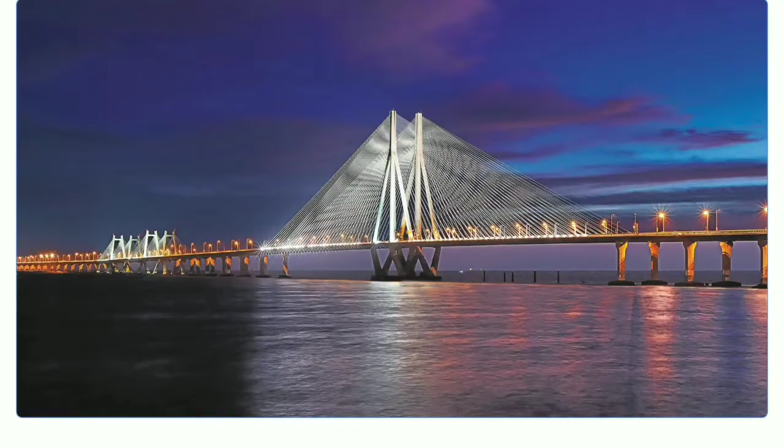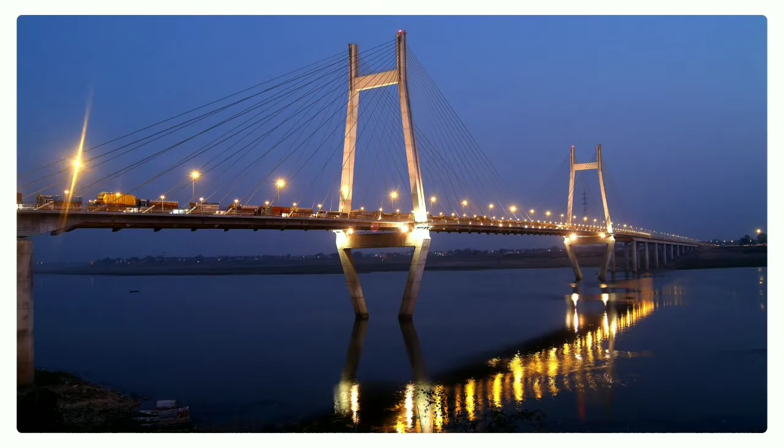I'm Sachidananda Joshi, and my topic for the day is enhancement of Indian bridge management system using analytics within BIM data model. Bridges connect two communities. They connect residential and industrial areas. They enhance the landscape of the city. BMS the world over was initiated due to the collapse of Silver Bridge in USA.

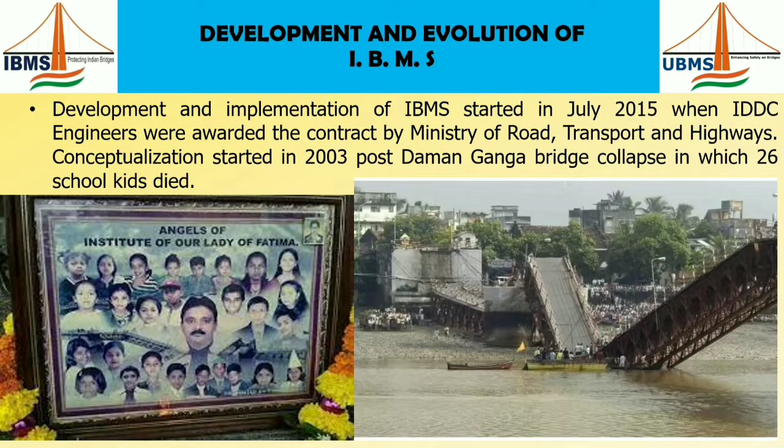Indian Bridge Management System, or in short IBMS, owes its initial conceptualization also to the tragic loss of 26 young kids. Conceptualization started in 2003 post Daman Ganga Bridge collapse, in which these 26 school children died. It was a tragic incident. We started the conceptualization and we conceptualized IBMS as a linear path protocol.

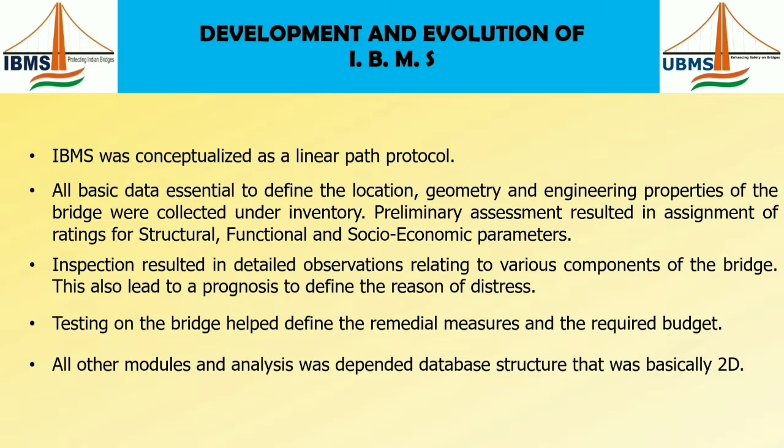All basic data were collected under inventory. The inspection resulted in detailed observation. Testing on the bridge helped us to define the remedial measure and the required budget. All other modules and analytics analysis was dependent on the database structure that was basically two-dimensional.

Preliminary assessment resulted in assignment of ratings for structural, functional, and socio-economic parameters. Ratings were assigned based on visual observations only. The rating system that we adopted was from 0 to 9. 0 indicated critical state and 9 indicated excellent state. These were used in progressive decision making process, so consistency and correctness during assignment was critical.

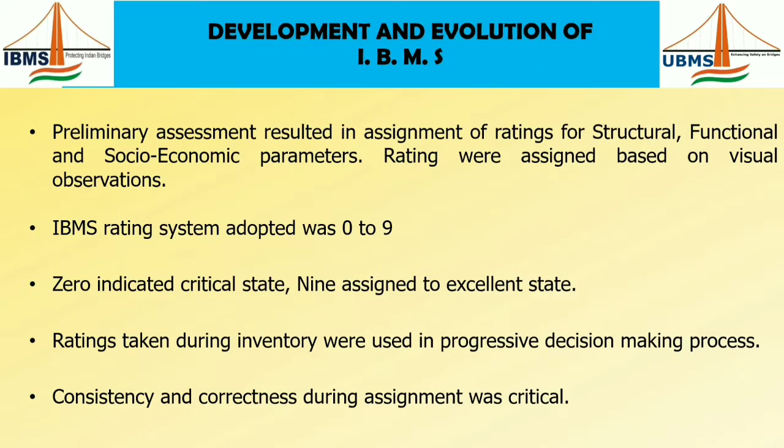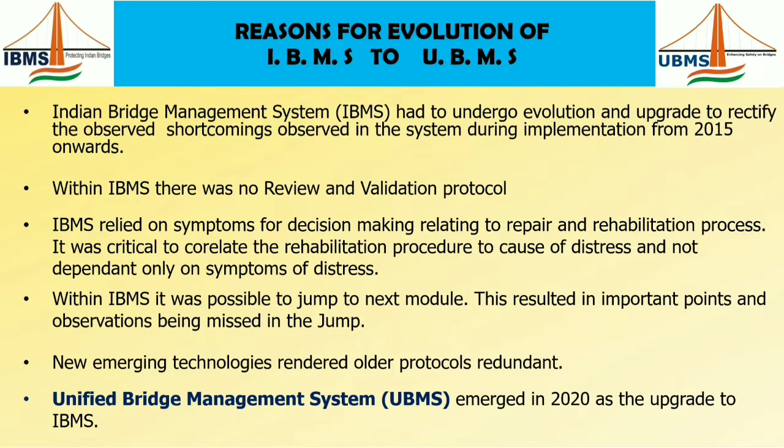What were the shortcomings that we identified during implementation? We realized that within the IBMS linear protocol, there was no review and validation protocol. IBMS was dependent on symptoms for decision making. Within IBMS, it was possible to jump to the next module. This resulted in missing important information, and the emerging technologies rendered our protocol redundant. What emerged out of the upgrade was called a unified bridge management system, UBMS.

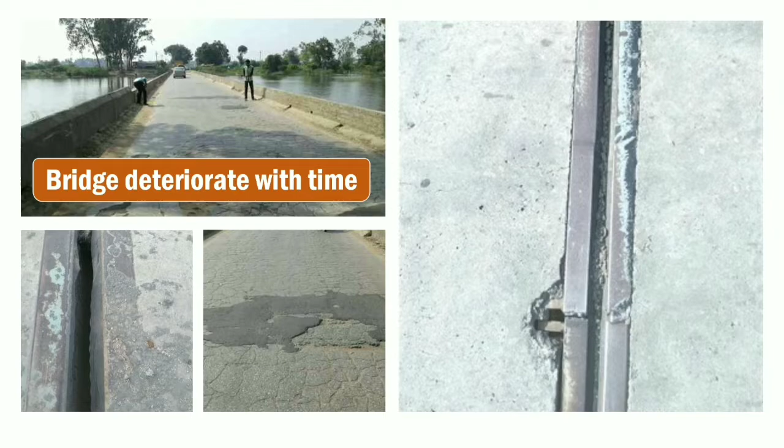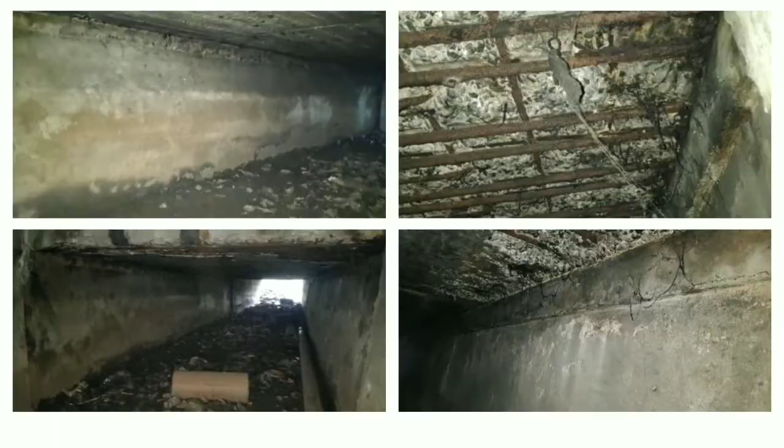One must realize that bridges, like all structures, deteriorate with time. Our system needs to mature with ongoing research and focus on the final aim to prevent such loss of people that occurs due to collapse. UBMS is an intermediate step in this ongoing research.

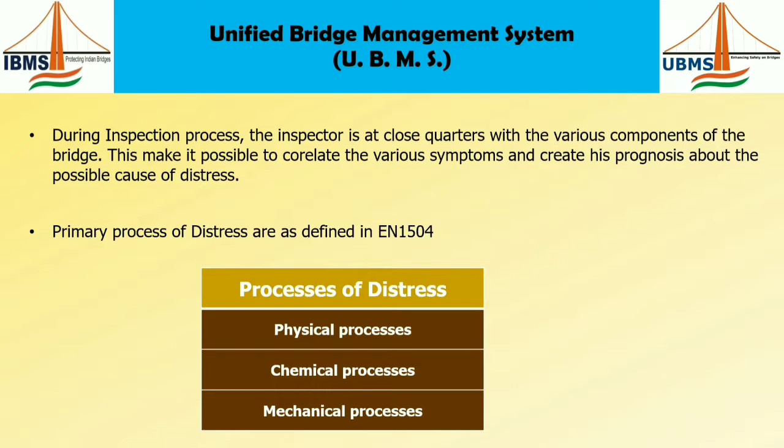So what is UBMS? In the inspection process, the inspector is at close quarters with various components, making it possible to correlate various symptoms and create his prognosis about the possible cause of distress. This is similar to when you go to a doctor: the family doctor makes his prognosis and then sends you one step forward. EN 1504 published in Europe defined three processes of distress: physical processes, chemical processes, and mechanical processes.

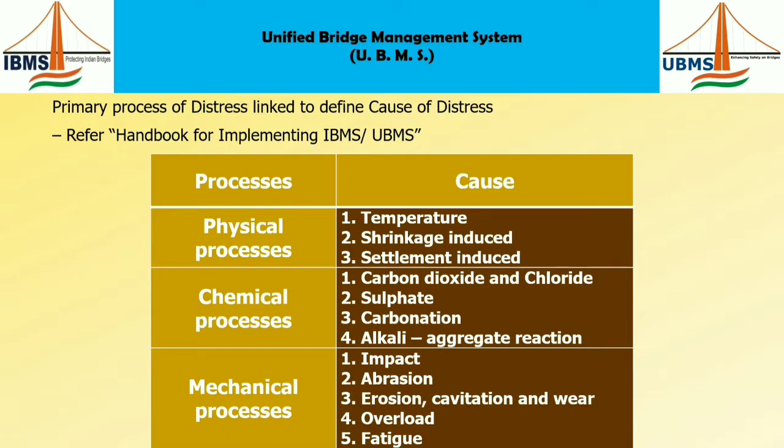Further, in our handbook for implementing IBMS/UBMS, we defined 12 causes as sub-processes or class causes within the physical, chemical, and mechanical processes. Based on the prognosis of deterioration, the inspector assigns a rating from 0 to 9 for various sub-processes, which results in a matrix called the cause matrix.

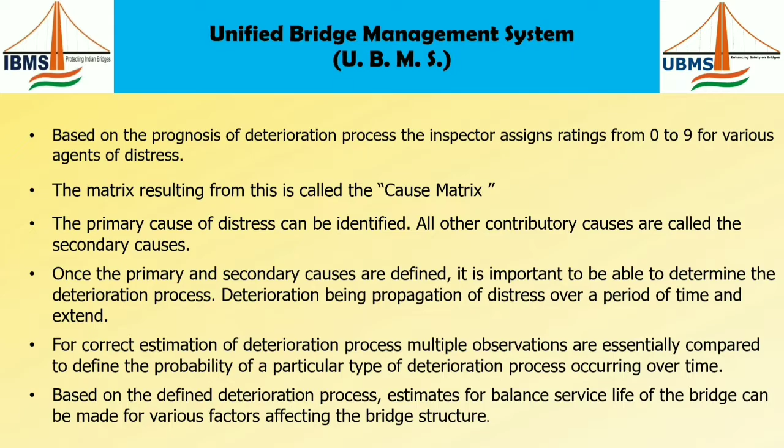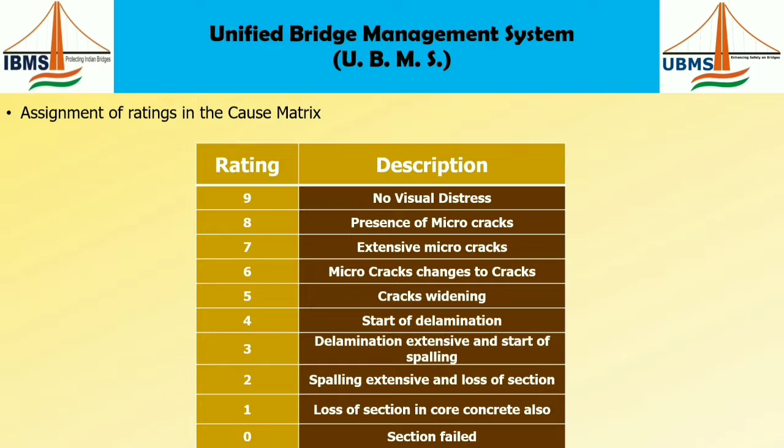Once the primary and secondary causes are defined, we need to determine the deterioration process. For correct estimation of the deterioration process, multiple observations are compared to define the probability of a particular type of deterioration process occurring over a period of time. This leads to estimation of balance service life of the bridge, which can be made for various factors affecting the bridge structure. Evaluation of balance service life estimates the risk involved.

Structural behavior is based on location of the loading and the reaction of this loading to various other factors, with the discontinuity in the section subjected to loading. Location of such discontinuity also affects the response of the section. One has to realize that the behavior of the structure is dependent on the geometry and various other conditions, including the geometrical location of the discontinuity.

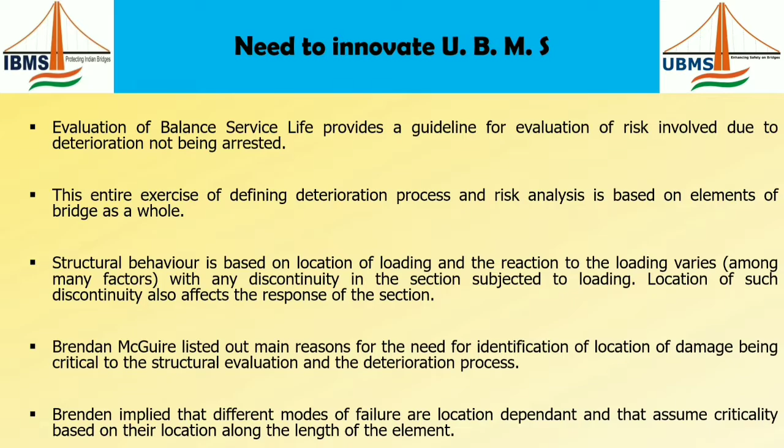Location of the damage is critical to structural evaluation and determination of the deterioration process. Modes of failure are also location dependent. It could also affect the load capacity evaluation of the member along the length of the element. None of the existing bridge management systems, including UBMS, is able to provide accurate digitized data relating to the location of the damage or distress.

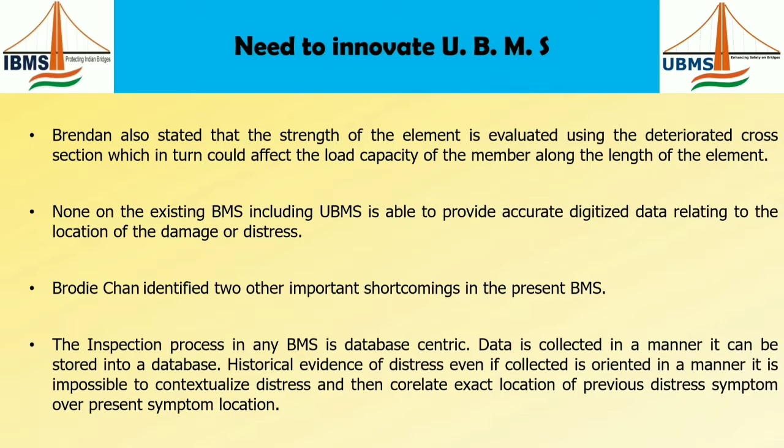They have sufficient data regarding the cause of the distress and other related factors to enable deterioration modeling to be done. But the critical aspect of the location of the damage or distress is a gray area. Research is ongoing. It is impossible to correlate exact location of previous distress symptoms with present symptom location because the data is based on a database. This hampers the correct evaluation of the deterioration model.

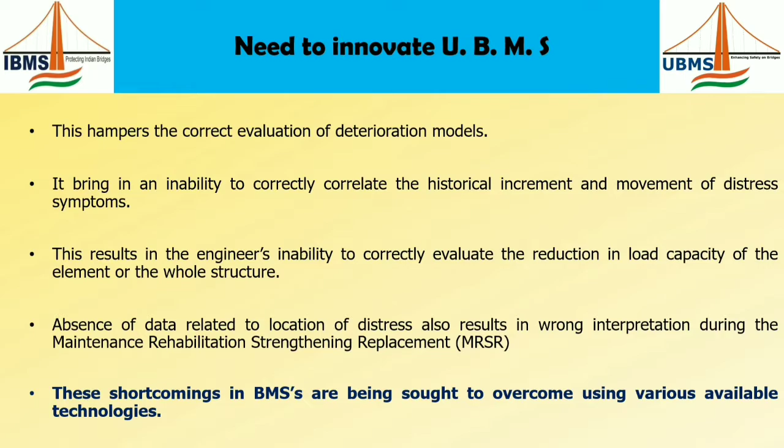This results in the engineer's inability to correctly evaluate the reduction in load capacity, and these shortcomings of bridge management are being sought to be overcome using various presently available technologies and ongoing research. So, what are the new technologies that have emerged? Advent of unmanned aerial vehicles or UAV changes the way inspection can be done.

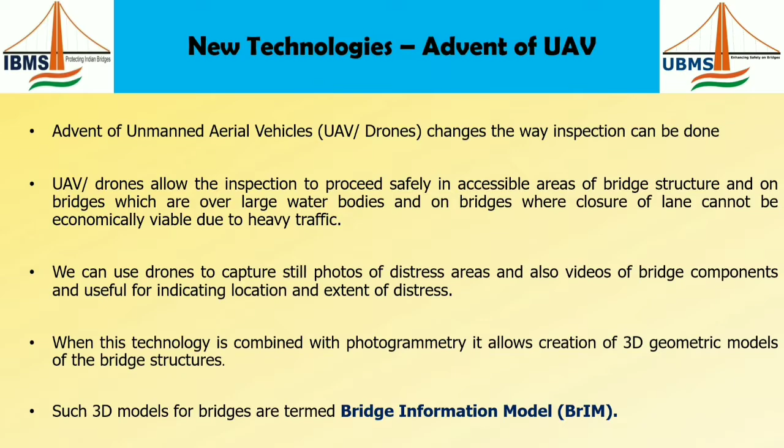We can use drones to capture still photographs or videos of bridge components, which are useful in indicating the location and extent of distress. We can prepare 3D models based on such videographs and photographs, and these models are termed bridge information models. Comparison of year-on-year photographs and video can indicate the progression of distress.

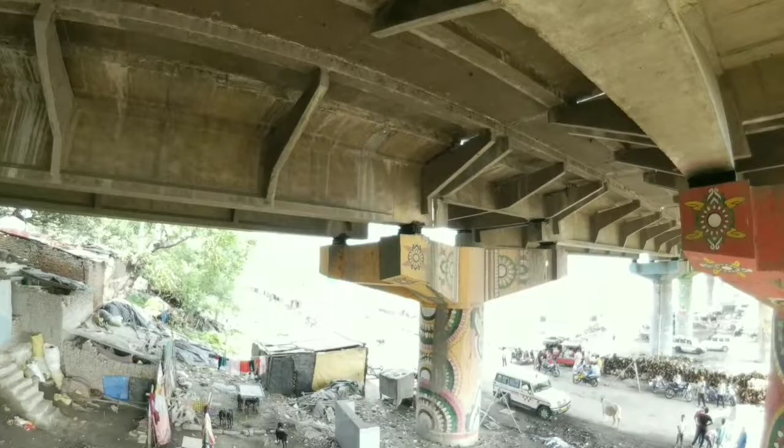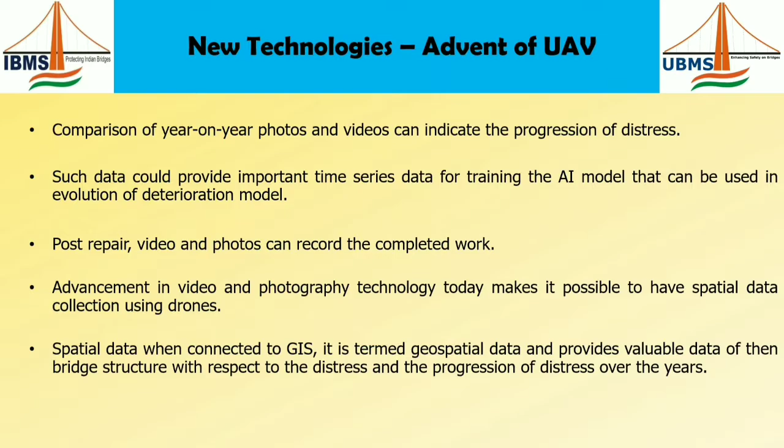Such data could provide important time series data for training artificial intelligence and machine learning that can be used for the evolution of a realistic deterioration model. Spatial data, when connected with GIS, can be valuable data for the bridge structure for determining the distress and the progression of distress over the years.

How can we correlate this? Photogrammetry is the next tool for 3D modeling. Photogrammetry can make 2D or 3D models and take measurements using photographs and video files. This technology, in conjunction with the drone-captured data, helps in the creation of a geospatial 3D geometrical model.

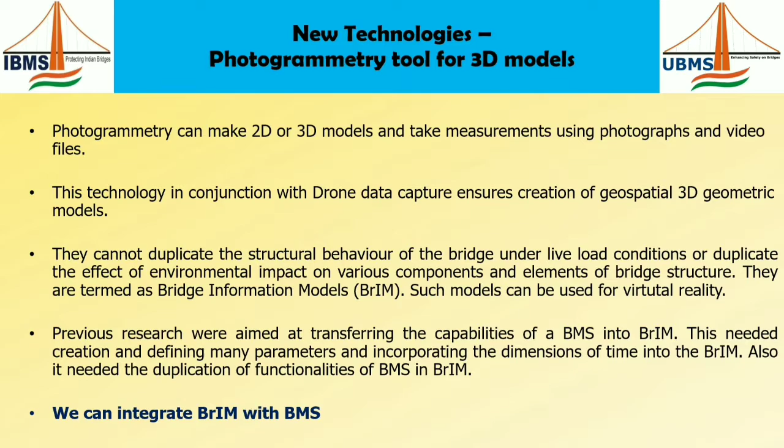All these models are purely geometrical models. We can integrate this with the bridge management system. So this brings us to an important question: why is the bridge information model required, and is it the final destination, or is it sufficient? UBMS is a cause-based bridge management system, and it relies on symptoms resulting from 11 deterioration processes.

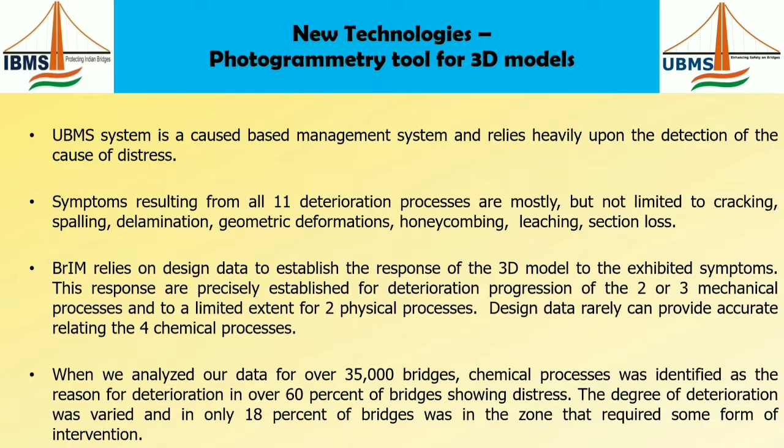When we analyzed our data for over 35,000 bridges, chemical processes were identified as the main reason for deterioration in over 60% of the bridges showing distress in India. Within UBMS, the digitized data collected for distress location is purely descriptive. We would still need to be able to correlate this data with the image library.

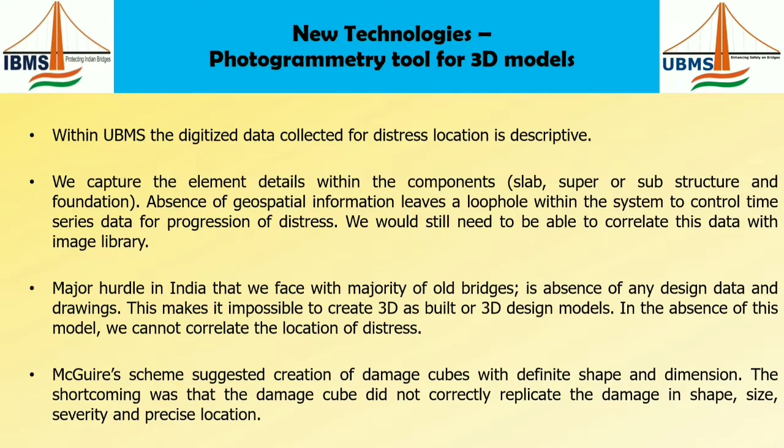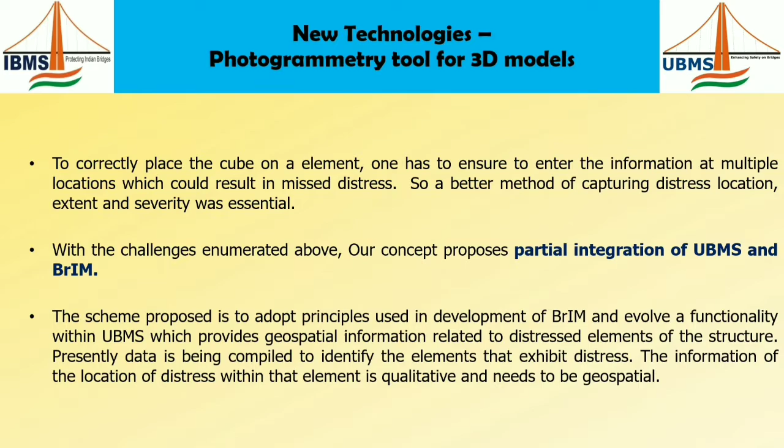No design details are available, and that is a major hurdle in India. In the absence of this, the model that we prepare can only be a geometrical model and cannot be a performance model or a digital model. With the challenges enumerated above, our concept proposes partial integration of UBMS with the bridge information model. The scheme proposed is to adopt principles used in the development of BRIM and evolve functionalities within UBMS to make it more workable. So, what is partial integration and how is it achieved?

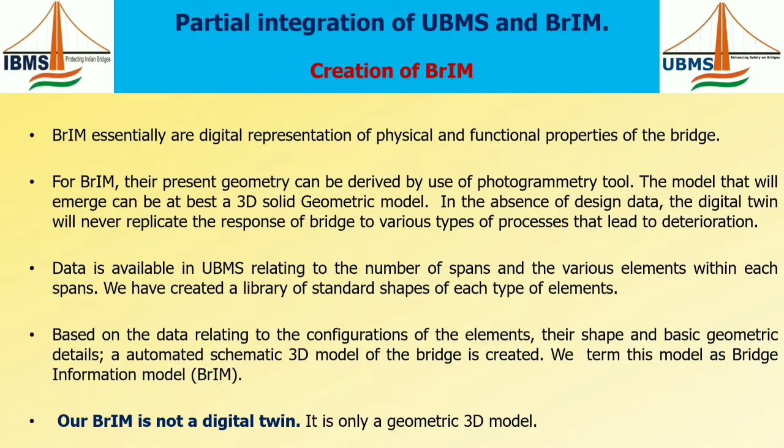The first point is creation of the bridge information model. Data is available in UBMS relating to the number of spans and the geometry within these spans. Based on the data relating to the configuration of the elements, we can create a schematic 3D model of the bridge. This is a geometrical model and it is not a digital twin. Various photographs of the bridge are then attached to the bridge information model.

For elements which show distress, continuous photos with overlap are used to create a 3D model only for that distressed element. This 3D model is created based on drone-captured videos or photographs. This model is for one distressed element, with details of the location of distress in the element. Since it relates to the location of distress in the element, we have termed it the LODE 3D model. Creation of such a LODE 3D model using real-time photographs ensures that the correct and precise location of the distress is captured.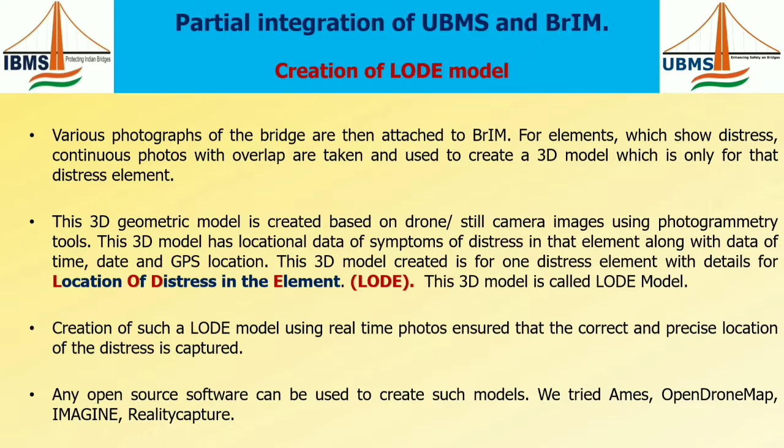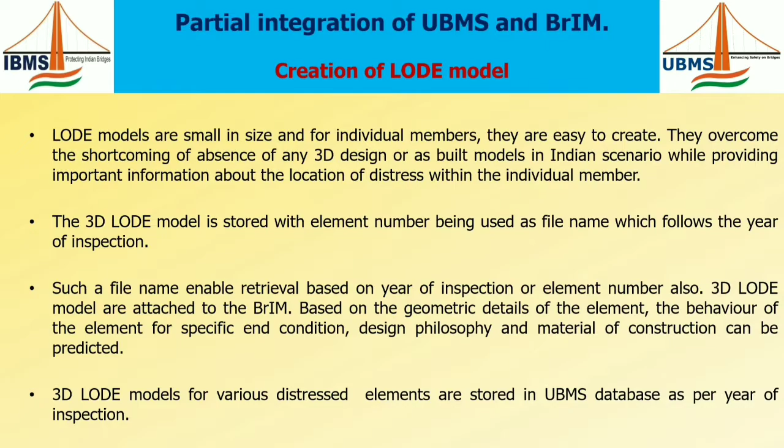These models are small in size and for individual members. They can be stored with the element number used as the file name followed by the year of inspection. 3D models for various distressed elements are stored in the UBMS database as per the year of inspection. Two important usages emerge from this. Firstly, the overall distress progression for the whole structure can be evaluated. Based on the model from successive inspections, a time series progression of distress for that element can be generated.

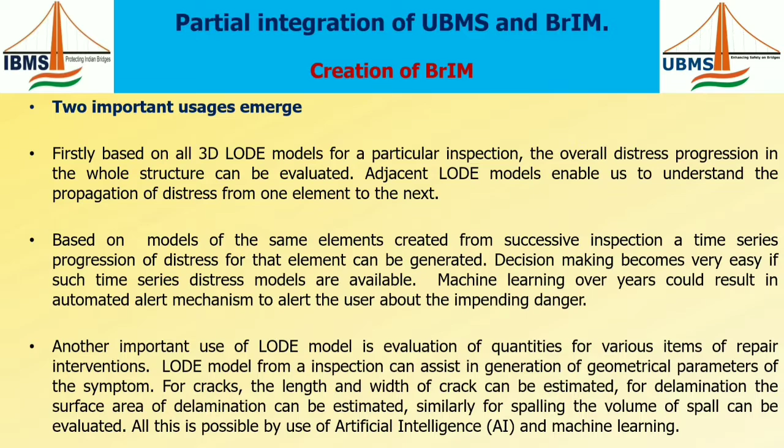The second important use of the LODE model is in evaluation of quantities for various items of repair interventions. The LODE model is used for further analysis of distress in the bridge and the impact of such distress on the performance of the bridge. This evaluation is critical for decision making. Capacity evaluation can also be integrated once we have the design data. This is unavailable in an Indian scenario.

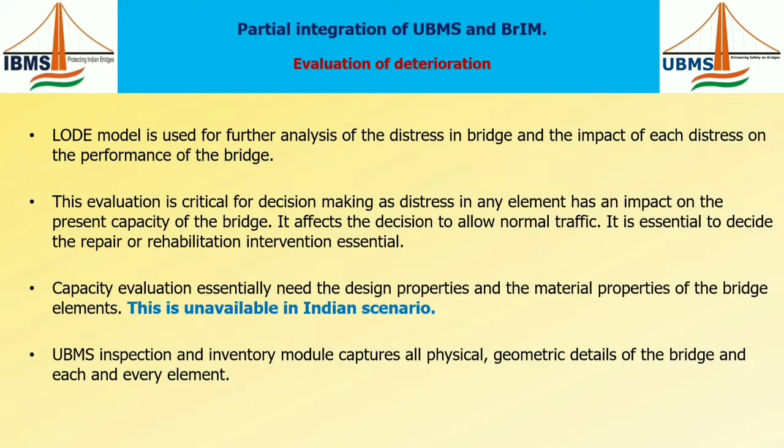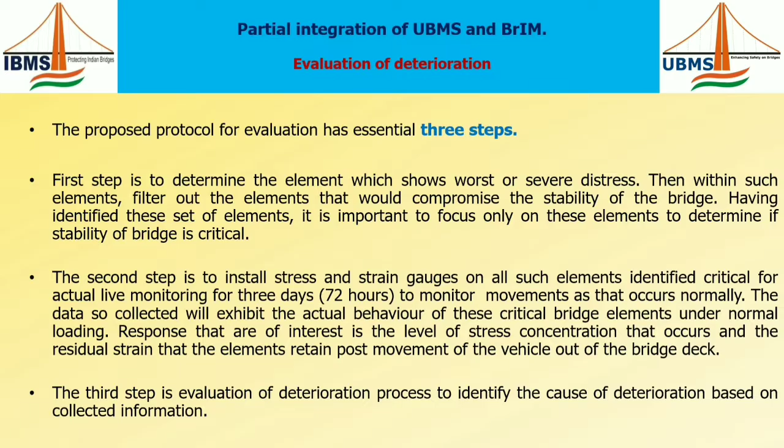The proposed protocol for evaluation has essentially three steps. The first step is to determine the elements which show worst or severe distress. The second step is to install structural health monitoring and monitor such identified critical elements for 72 hours under normal live load. The third step is evaluation of the deterioration process to identify the cause of deterioration based on collected information.

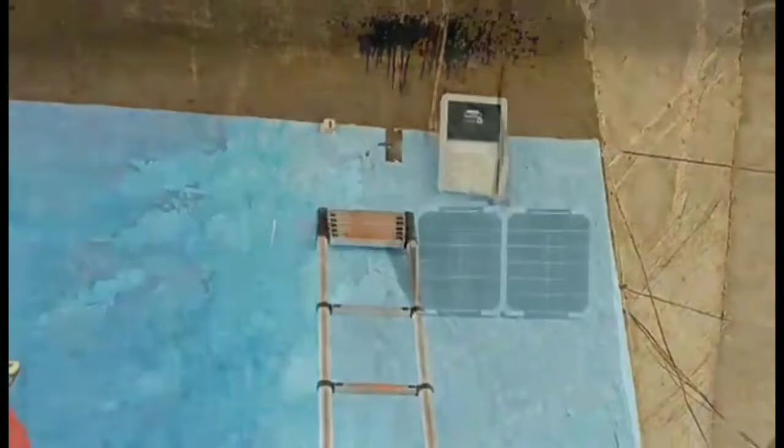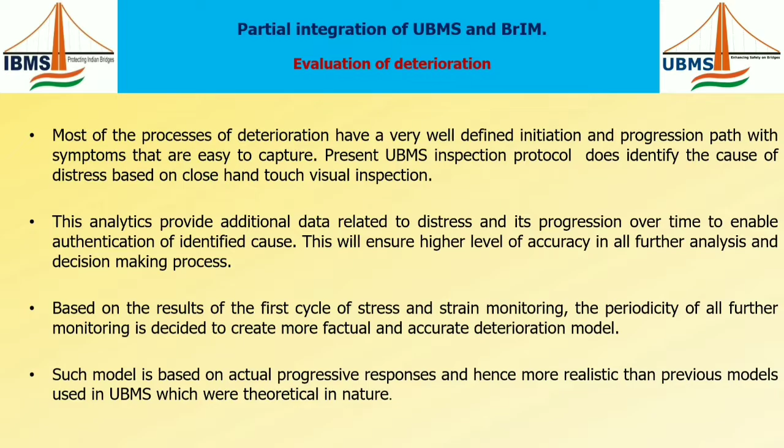Most of the processes of deterioration can be very well identified, and the progression path can be easily captured. The analytics provide additional data related to the distress over time to enable authentication. Based on the result of the first cycle, the periodicity of all further monitoring can be decided.

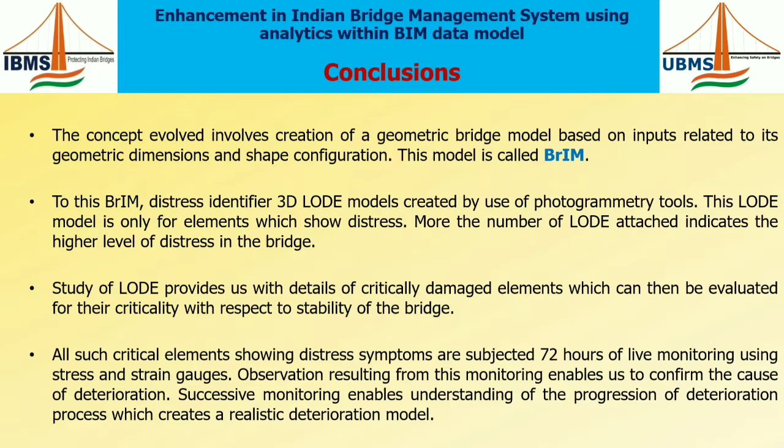Coming to the final conclusion, the concept involves creation of a bridge information model. To this bridge information model, we attach the location of distress in element model, or LODE model. Study of LODE provides us with details of critical damaged elements. All such critical elements showing distress symptoms are structurally health monitored for 72 hours. The evaluation of deterioration and its progression, being realistic, will yield sufficient data.

Future scope involves use of artificial intelligence and machine learning. Research is an ongoing process leading to maturity of the established system, resulting in reliable and increased efficiency of the system. Results can be delayed, but accuracy can be achieved.